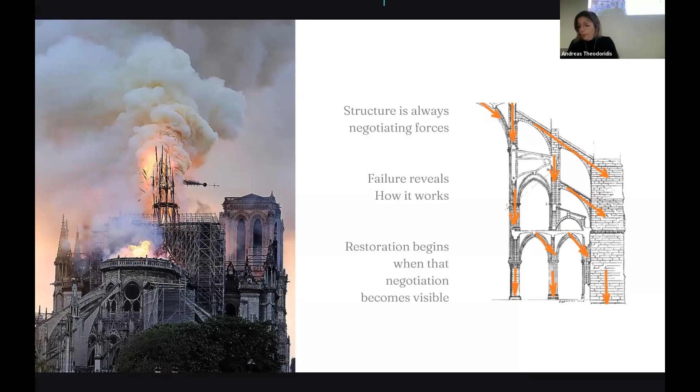But the clients are not on their own. There are many different forces that play a role here. So the new owners, they want this holiday home. The local community, in the meanwhile, have a very strong feeling about this building. It's theirs. It's the community's building.

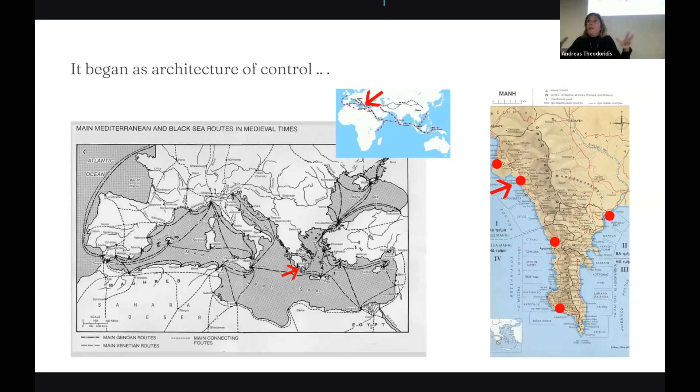And eventually the Venetians came up with this fantastic plan, and they gave the Maniots the power to set up customs houses. So what they said is, don't do piracy anymore. We will run all our commerce, all our trade through you, as long as you offer us safe houses. So this customs house worked as a safe house in a way. The Maniots protected this house. And so the actual building was very much about controlling trade and controlling power at the time.

But here, 2 centuries later, we're talking about negotiation, not about control. And when we talk about new buildings, or maybe when it was built, the idea is optimization. How do I make this better than anything else? Now, it's not about optimization anymore. It's about compatibility. And we'll talk about that quite a bit.

Okay, one of the things that I would like to say before we go any further is that this customs house was a massive project at the time, okay? It was big. The actual building was not accessible by land, so all the material had to go by boats, all the labor had to be trained and everything like this. It was a big project for the time. But it only lasted for 40 years.

After 40 years of working as a customs house, political shifts, the different trade routes, new power schemes and everything like that made it irrelevant. So this building, which was assumed to last forever, that is what the architecture was meant to do, actually history didn't cooperate. So that's part of the story behind this building.

So what we got, this is the building as such. You can see that the original building was actually founded on bedrock. So there was jagged bedrock and they built up from there. As I said, there was no access. Most of it was built in different phases, even when it started. So they started with the half of the long building, and then they built from there.

They added to the front, and then they added an extra floor, and then they added a small tower to the side, and then they added a sort of in-between space. And all this was very protected. So on the lower level, you can see that 3 sides, this side here, 4 sides actually, this side, and this side, originally had no openings. There were more than 150 gun holes, however, that we recognize, and there were probably more, so this was a fort as such. The only sort of accessible area was this, that was protected by the actual building and the gun holes and everything like that through there.

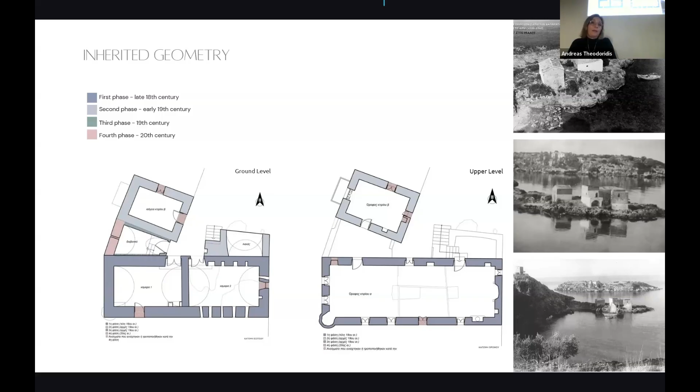So this is a process. This building was built in different stages. And then we come along in 2014, and we are asked to change this fortified building into a domestic dwelling. I mean, this is a fantastically big change, because we're talking the same building, but on the other hand, we're talking completely different use and a completely different program.

But before we go there, we need to see what we needed to do, because you can't actually start intervening in a building that you don't know anything about. You have to understand how this building was actually built. So in order to do that, we have to take away layers and layers of additions that happened over time, of fortifications and everything like this. And we had to make all these drawings, which made us feel a bit like romantic archaeologists for a short while. It made the archaeological authorities quite happy as well. But it also gave us a good understanding of how this building was built.

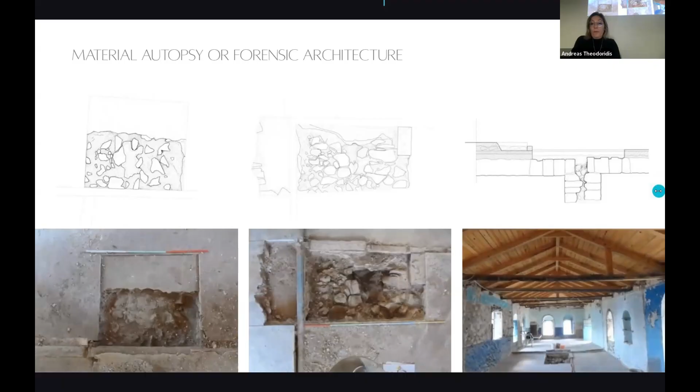So we took down quite a lot of plaster and we discovered a few things. Now here we did the drawings of all the cracks. Cracks technically are a language of destruction. It's important to understand the cracks. So you look at the cracks, and if you have enough experience, enough intuition, you can tell certain things. So for example, vertical cracks at corners mean there's been settlement in the foundations.

Diagonal cracks mean shear and thrust have lost their equilibrium. Separation between phases means different materials don't connect and don't work together very well. Erosion at the base means moisture and salt have got into the building. So you need to macroscopically understand this building, and you need to document everything that you find during this process in order to understand how it happened.

And one of the things that we did understand is that one of the most destructive things that had happened to this building is that at some point they added a layer of steel mesh and concrete to the building. Now then, the concrete, which is a horrible material I will talk about later when it comes to restoration, had actually corroded the steel mesh, and the steel mesh had eaten away at all the limestone behind it.

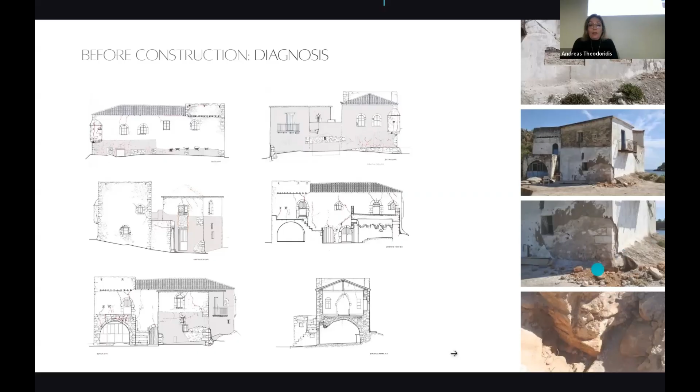And another thing that had happened is that at some point they put in a jetty, a sort of big concrete structure, and they actually buried the building by 1.5 meters. So that didn't look very good, but it did actually protect the building until we got to it. So in a way, you know, good and bad there. But this is what we did. We did all this documentation.

However, models are only hypotheses. They're not the real thing. The real thing is the building. So when we actually, later you will see, removed the plaster and everything, we found that some of what these models had told us was true as a tendency, but a lot hadn't been revealed. And we found it when we started to take away more of the thing.

So here, this negotiation is not intuitive anymore. It's quite scientific in many ways, but nevertheless, despite the fact that it has been done to our knowledge to the best possible level, it remains an assumption. And assumptions are often unstable. You need to be very careful with them. The model, in other words, just confirms tendency. It doesn't dictate the intervention. The intervention you have to understand on site.

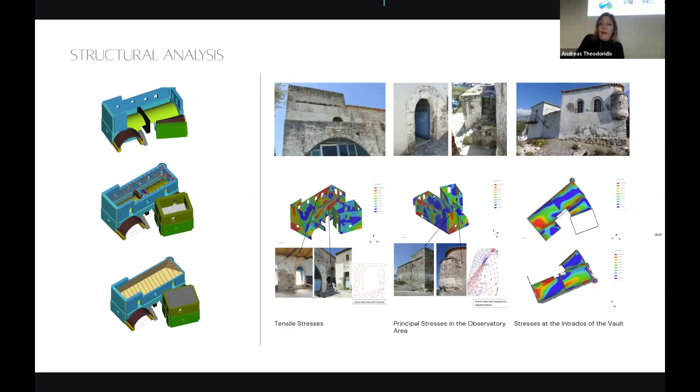Now then, after we'd done all this, we submitted. Now this happened in late 2014. And then we were talking about negotiation with structure. Here is negotiation with institutions. I mean, this is a different kind of negotiation. We had to take this project and submit it to multiple different authorities. They had very many different contradicting opinions about what we should and shouldn't do, what we should be allowed and what we shouldn't. There were approvals, then there were reapprovals. There were conflicting decisions. There were all sorts.

Eventually, 4 years later, in June 2018, we got the permit. Now, this meant that the clients actually stood by us, and that's an important factor to keep in mind, because clients are not happy to have to wait for 4 years and pay for 4 years of endless submissions and resubmissions.

Okay, so here we go, we start. No, before we start, I won't go on to all the different proposals, but at the time we wanted to do something quite different. And so we decided that what we were going to do was to create these beautiful shaded sort of filters in order to open holes and windows into the lower level, which was a fortified level. And there was a lot of talk about whether we should change the character from a fortified sort of wall into an open wall with windows.

Okay, so after that, we have the building permit. Oh, it might have been that horrible photograph of me that got it approved. But there you go. Okay, so here we are, we start.

One of the things that was an enormous change that we had to make is that forts don't need sewage. Domestic use does. So we had to introduce sewage. And of course, we couldn't connect to a central sewage system because there was none in the area. And so we had to build this septic tank. Now, this was not easy because we are excavating right next to 200-year-old stone walls into bedrock, lower than the sea level. And we have to make this watertight septic tank that is big enough for normal use. You don't want to have to empty this every 2 weeks. So it has to be relatively big.

And they also need an engineering room because they want to install all the different electrical panels, automations and things like that. So this is trying to make invisible the necessity that you need in terms of infrastructure for a building to work. Okay, so all this work, as well as other work that you will see, which is very much part of what we did, was rendered invisible, which is exactly what we wanted it to be.

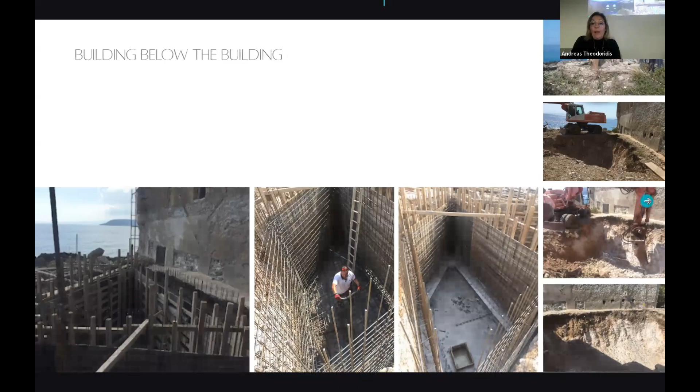And then we started to remove, oh no, the punchline. Okay, so we started to remove all the plaster. Okay, so we stripped it all back. And what we basically removed was the concrete. Concrete is a very, very strong material. And for many years during the 20th century, it was used in restoring historic stonework and masonry because strength was thought to be durability.

But that was proved extremely wrong because the water resistance that concrete actually offered was not protection at all. It destroyed. What happened was that it's rigid, it is impermeable. And so buildings that were treated with concrete eventually, over time, through little cracks and other problems, allowed water in. And once the water was in the actual body of the wall, it was trapped because there was concrete everywhere, so it couldn't evaporate, it couldn't leave the building. So this water accumulated within the body of the building and caused enormous damage.

In the very short while that concrete was accepted, it caused more damage than centuries of just normal decay and things like that. So there we are, we're removing all the concrete, and we're finding that this wall is actually in a much worse condition than we thought it was, because a lot of the stones have already been seriously corroded because of the mesh that we removed. And also because quite a lot of the material that kept these stones together has been washed away over the years from the sea, being close to the sea and everything like this.

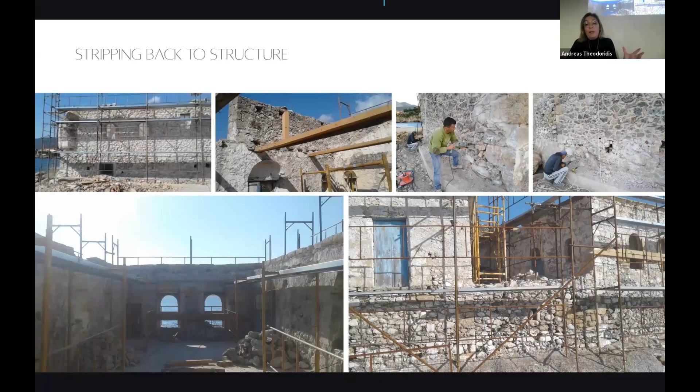And so here we are, we've completely opened. We have shuttering around the building. This is September. And then one day, this happens. Medicane. This is a Mediterranean hurricane. They exist, and it hit Mani. And it hit this building just as it was in its most vulnerable condition ever. It was completely open. All the pores were open. All the grouting had gone. So all the seawater entered the body of the building.

It took 50 tons of clean water and 3 weeks of washing it carefully, because you can't actually shoot water at the building in this condition, washing it carefully with buckets and things like that in order to clean it and bring the salinity level down so that we can move on to the next stage. So here we're negotiating environment again, more negotiation.

Okay, now then, the first thing that we did was give it a roof. Now the roof is an important part of a masonry building because it sort of makes the compression work. Otherwise, you've got walls on their own. Whereas when you have a roof, you're tying together everything. So it was very important to get the roof in. We put in a ring beam, a concrete ring beam. So we're not being completely purist here, but we needed the concrete beam.

And of course, we had to follow the instructions of the authorities. And the authorities wanted a classic Byzantine style roof, and they wanted non-industrialized wood, and they wanted bamboo as lining, which would be what you would have in this kind of roof. And they also wanted the classic monk and nun style tiles. Now, this posed a serious technical problem, because reclaimed tiles, which is what they wanted us to use, are compromised because over time the actual ceramic loses its durability, the porosity allows the water through. So the concave tiles, the nuns, if you like, just couldn't be reclaimed because that wouldn't allow the roof to work correctly.

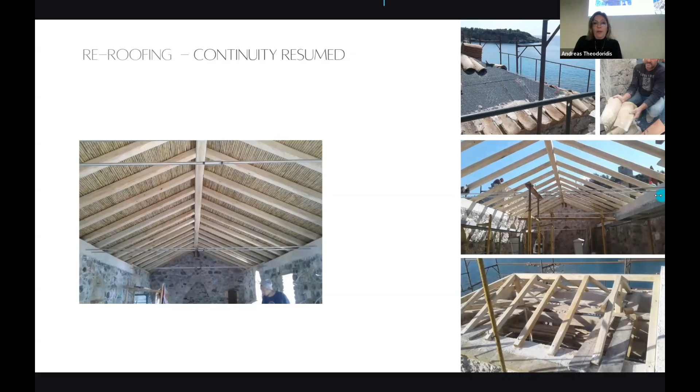So after that, the next thing we did is we injected, and I've talked about concrete a little. Obviously, we couldn't inject with concrete. We injected with a mix which is much weaker. So this is lime-based, mostly pozzolan and superplasticizer. That makes the whole thing become much more liquid. It takes longer for it to dry, but the whole idea is that this is a very breathable material, and it allows for the structure to be consolidated.

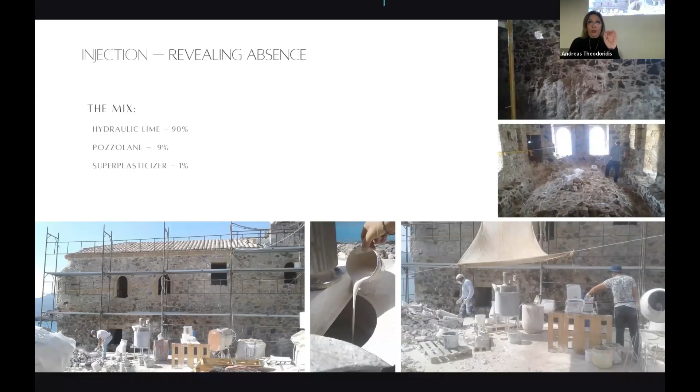Now, what we found, which was interesting, it was a shock as well, is that based on what we knew and the textbooks and things like that, we had allowed for approximately 10 to 12,000 liters of injections. We ended up with 30,000 liters of injections. Now, that means that approximately 30% of these walls was void. So one of the things that comes from this is a rather poetic phrase, which is you don't know an old building until you inject it. But it's important to remember that when we talk about restoration, most of the damage is invisible. So you need to be very careful in what exactly you are doing and how you're intervening. Okay.

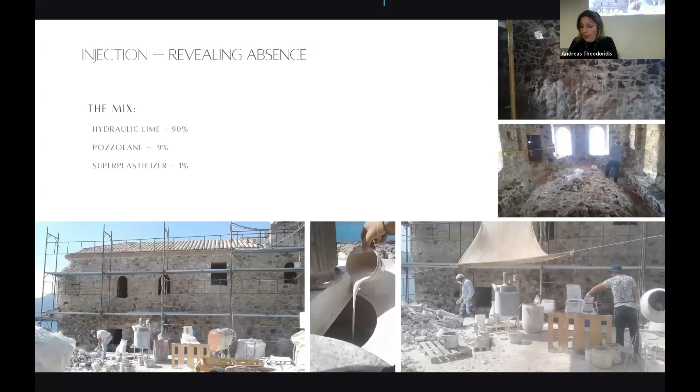Okay, so talking about integrating the invisible, another thing that we needed to do was, outside of the consolidation, we needed to introduce tie rods into the building. So the actual building is held together with these steel tie rods. In order to do this, we had to drill holes that went 20 meters into this masonry and through the other side. Now, this meant that this particular crew built a special machine that allowed this to happen. This is technically quite a difficult thing to manage.

And we didn't only introduce tie rods, we also introduced the sewage. So this image here is the sewage, so vertical sewage through the walls and everything like that. Now then, the thing here is that if you want to be real, you should, in theory, have all this intervention visible. But if you do have all this intervention visible, and you do a Pompidou, if you like, then what you're doing is that you are actually compromising the character of the building. So it's about integrating the invisible in order to not violate the visible, if you like. You need to decide what you're keeping and what you're losing.

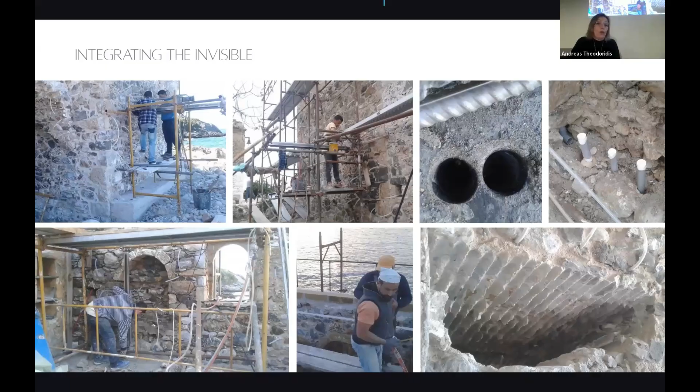Okay, now then, as I said, this building had no connection. The rooms downstairs were disconnected, so we had spaces that needed to be connected on the lower level, but also the two levels were not connected, so we needed to cut through the vaults. Now, the vaults are compression structures, which means that they work because forces are evenly spread across their surface, and so cutting a vault is something that you need to do with surgical precision. Thank you.

So this was probably one of the most difficult things to achieve, but it was also one of the most radical changes we made to this building, because in connecting all these spaces, we actually changed its form far more than I think the authorities realized. I mean, the actual character of the building, which was this fortified, closed, non-connected building, was suddenly opening up and connecting and becoming a home through this.

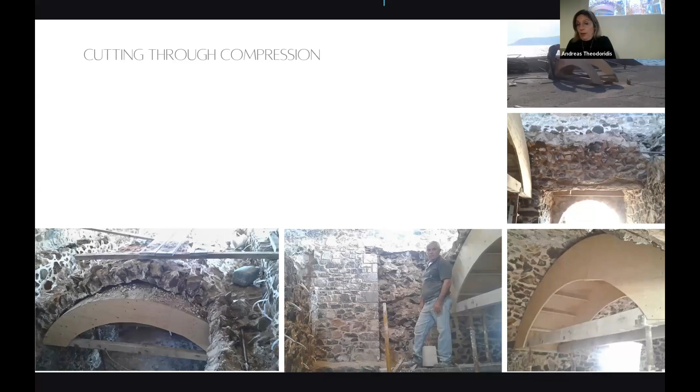And then we consolidated the vaults from the top. Now, this is what a vault looks like when you clean it. So we used the triangles here on the top of the vault in order to install all the electrics and everything that we needed to do for infrastructure. And then we filled that, but you don't actually fill it with concrete. You fill it with sand, and you just put a layer of concrete over the top in order to keep that sand down. So it's the weight that brings the compression, that keeps it all in place. And of course, after we'd finished, this is what it looks like.

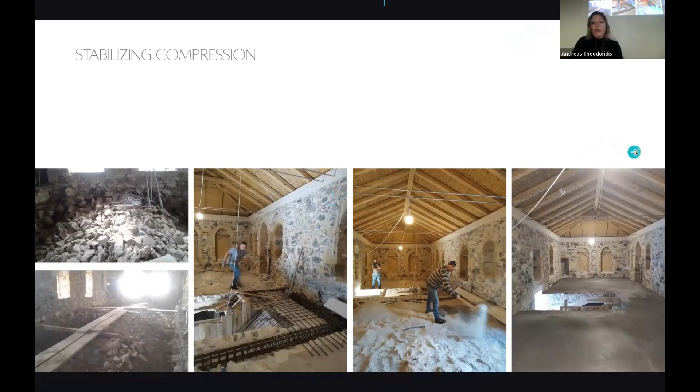So here we tried to establish a continuity. We tried to introduce materials which would not antagonize the original materials. We didn't try to fake it and make it look like it always was that way. And so we also managed in doing so to introduce a door, which is this door here, which is a door that sort of connects the outside of the building on the seaside with the inside of the building. So this cut through the building was, in fact, probably the most radical thing that we did.

Okay, but what we did manage, I think, going back to whether it's the same building or not, we did manage to reinstall a continuity in the forces, a continuity in the structure, and of course, we continued to negotiate throughout the whole process. Okay, I'll go into a different kind of negotiation now.

I'll go into the general idea of whether or not it is sustainable to restore. And of course, you've probably all heard the very, very cliche phrase, the greenest building is the one that already exists. Now, this is very true. And the reason why it's very true is that an existing building already has quite a lot of power that is inside the building already. So it has all the labor that was used in order to build the building. It has all the lime that has been burnt. It has all this energy that has been incorporated into the original building.

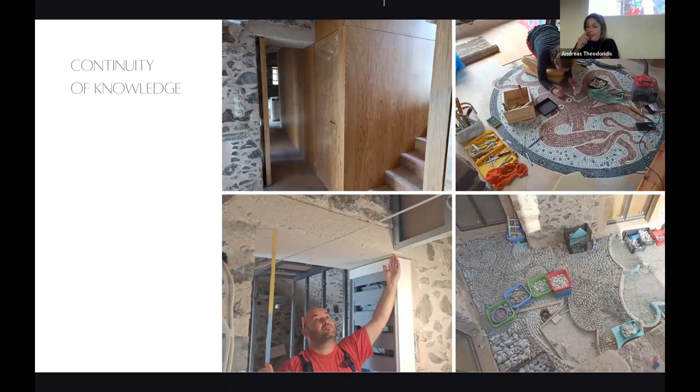Okay, let's think about what is heritage, because what we're building today is tomorrow's heritage. So it's important to know when we do that, what it is that becomes heritage. Why this building? Why not another building? Why does something become heritage? When does it survive? Because a lot of what we do doesn't survive, okay? When is it protected? When is it loved? When is it filmed? When is it remembered?

And I would argue that this is all true when the building is seen as an archive, because a building, outside of incorporating energy and culture and everything like that, it incorporates evidence. There's evidence in that building. There's traces of labor. There's traces of mistakes. There's traces of destruction, of environmental things, of political shifts, of changing owners, changing priorities, everything. So this is an archive. When we edit this archive, we are allowing it to continue. We are allowing it to remain part of our conscious identity as such.

And talking of identity, let's go back to that question again and again. There is this very well-known philosophical paradox, which is the boat of Theseus. Theseus, do you know what the Minotaur is? So Theseus is this ancient Greek mythical figure who went and killed the Minotaur, and the Athenians celebrated because then they became the superpower of the time. So he came back in this boat, and this boat was kept by the Athenians in order to commemorate him. And they kept replacing bits of it that decayed, and eventually they replaced the whole boat. So the paradox is, if the material is all gone, is the boat still Theseus' boat?